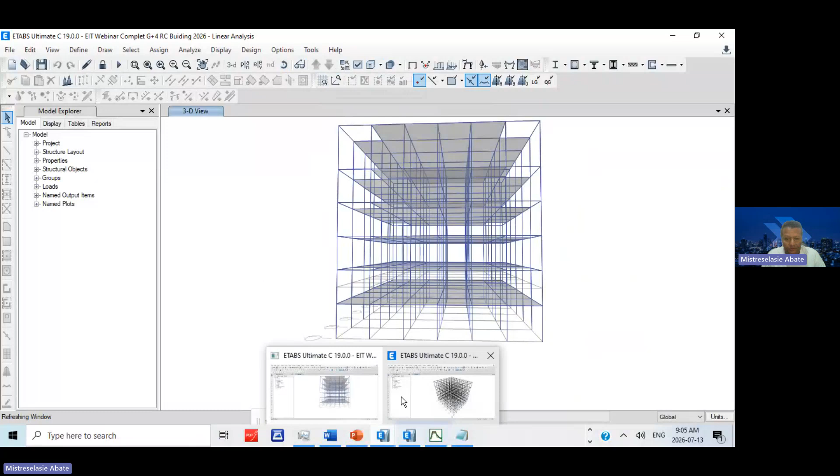In this presentation, we are going to show you not only the theoretical part, but also a sample ETABS model. This is a linear model, and we also have another nonlinear model. We will discuss this software.

And if we have time, I'm going to show you real life buildings, what we are doing. So it's going to be interesting.

If you want to know more about me, you can scan this barcode and you will get to know me. Today we are going to discuss structural modeling for PBD, performance-based design, including material properties, section definitions, load patterns, and performance objectives based on FEMA 356 and ASCE 41-17.

Pushover analysis is another type of analysis; its implementation and interpretation we will see, and evaluating structural performance in retrofitting, and an overview of performance-based principles, focusing on structural behavior, especially nonlinear analysis techniques and performance objectives.

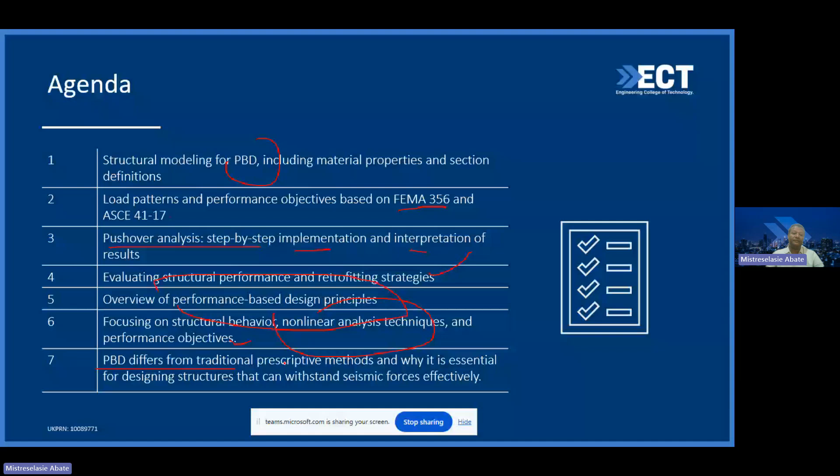PBD is different from traditional code-based design, and why it is essential. These are some of the agendas we are going to discuss today.

At EIT and ECT, we publish papers which are very critical. You can find them here and read these papers. It will give you tremendous amount of knowledge about performance-based design and about the modeling part, the linear modeling part. You can go ahead and check the part 1 webinar we did previously to get more information.

Today we are going to discuss why performance-based design matters. To know that, at EIT we did this bibliometric paper, Global Research Trend. What we did was try to analyze 3,469 PBD related papers, from 1983 up to 2024, and we used VOSviewer.

And we try to see the knowledge, how it's going. So as per our research, what we see is starting from 1981 until 2023, PBD was increasing. The awareness is increasing throughout the world.

So what we did in this research was we tried to see preferred journals, leading countries, leading organizations, and international institutions, identified utilizing the Scopus database. This is what we did, and you can also read the full research paper.

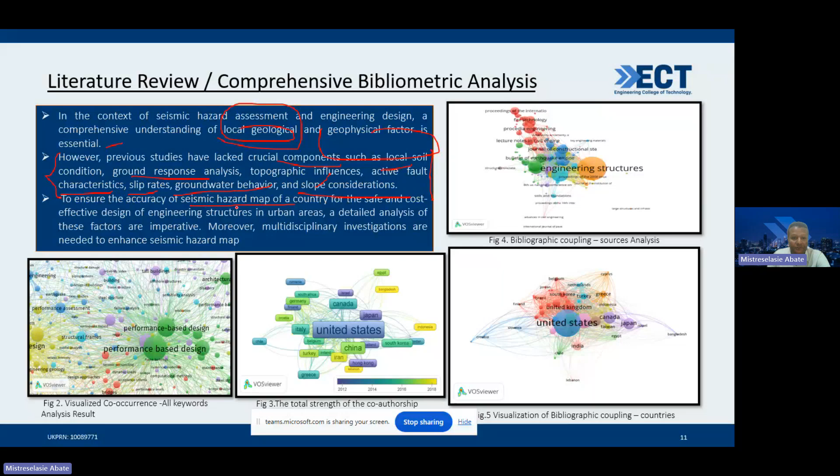As per our bibliometric analysis, we see that the Engineering Structures journal publishes a lot. The United States is the country which does better in performance-based design, and it's doing good with performance-based as the keyword. We were checking the co-occurrence of keywords, and performance-based came out as the most significant.

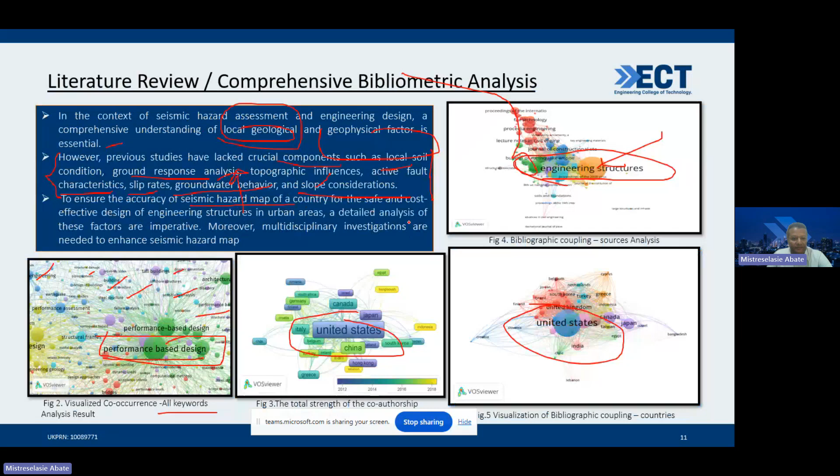So in general, from our research, what basically the hypothesis is this: we already proved it, but the challenge of adopting seismic design code without necessary adjustment, accompanied by the absence of reliable seismic mapping in the country...

Without earthquake recording stations, this may lead to structural failure. In such context, performance-based design emerges as a viable and critical solution for ensuring structural integrity and safety of both existing and newly constructed buildings.

This is a very important point. So in our study, through extensive literature review, what we found was code-based design cannot address earthquake design issues. This was the first finding.

And PBD is a cutting-edge seismic design technique. The effect of using a prescribed adopted code without amendment is very dangerous. And design approaches focusing on force are not adequate.

And the shortcoming of seismic hazard maps and PBD was introduced in the United States, and how the earthquake in Eastern Japan alerted Koreans to assess their building code. All these things were found.

Overall, this study provides a comprehensive overview of the research on performance-based design and identified the key research topics and future directions in the PBD area.

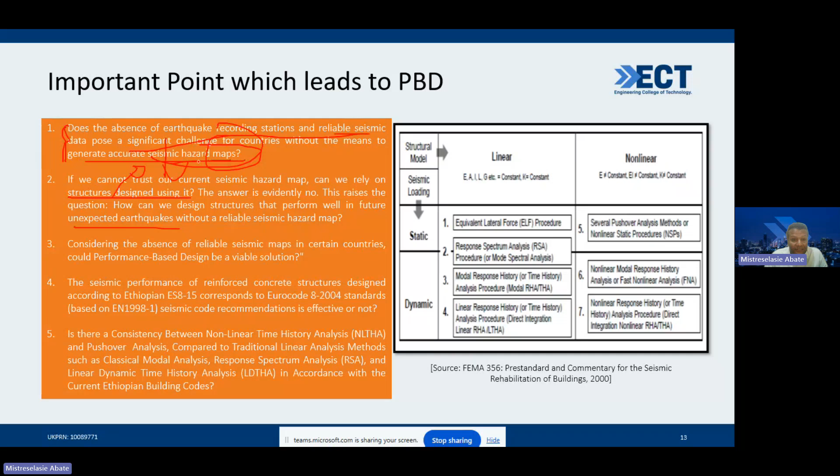This raises the question: how can we design structures that perform well in future, unexpected earthquakes? Because this seismic hazard map will give you the level of earthquake, maybe 4, 5, 6, but it is not reliable. That is a problem.

So considering the absence of a reliable seismic map in certain countries, could performance-based design be a viable solution? This is the most important part.

So the seismic performance of reinforced concrete structures designed according to Ethiopian code and its recommendations is effective or not. This was also something you should consider.

And the other one is the consistency between nonlinear time history analysis, classical modal analysis, pushover analysis, and response spectrum analysis. We will compare these. So these were the most important points.

In general, we have linear and nonlinear analysis: equivalent lateral force procedure, response spectrum, modal response history analysis, and linear response history analysis for linear static and linear dynamic analysis. For the nonlinear part, we have pushover analysis, nonlinear modal response history analysis, and nonlinear response history analysis.

So we have this and this one. These parts, we will use all this kind of analysis. So at the EIT, this was the research we did, where we did 44 story and 100 story. The problem was, if the specification of your laptop is not sufficient to analyze this as a performance-based design, it will take a lot of energy, and that was the problem we faced.

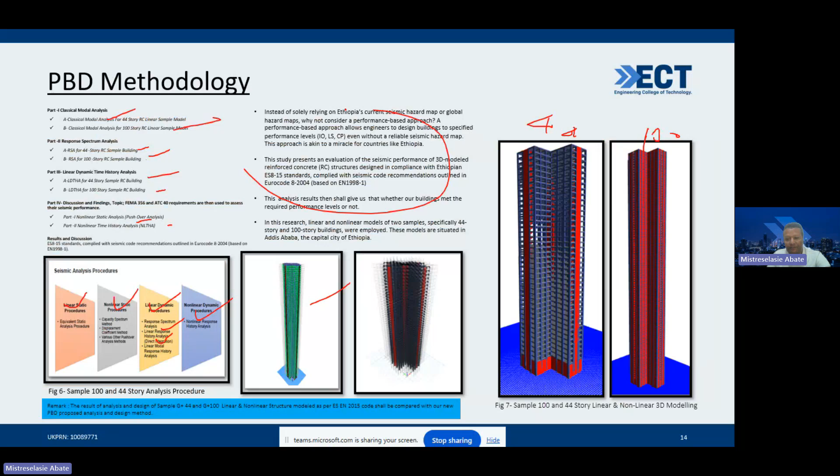But this was the performance-based design we did at the EIT, and we incorporated linear and nonlinear analysis, especially linear dynamic response spectrum, linear time history analysis, and everything. All the analysis types were included, and the result was compared. So this was for the 44 story and for the 100 story, and this was the property of the building we did.

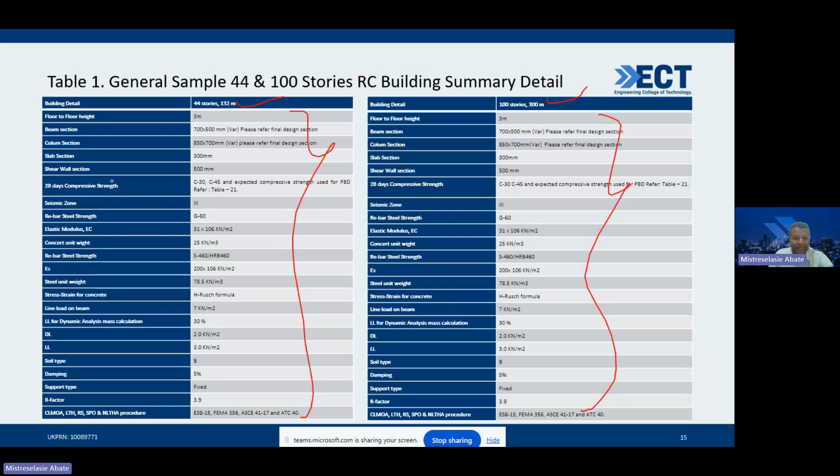So the organization of the dissertation is as follows: you have classical modal analysis, equivalent lateral force procedure, and response spectrum analysis, which will be in the linear analysis. Nonlinear time history analysis and pushover analysis will be done in the nonlinear part. This will be the organization.

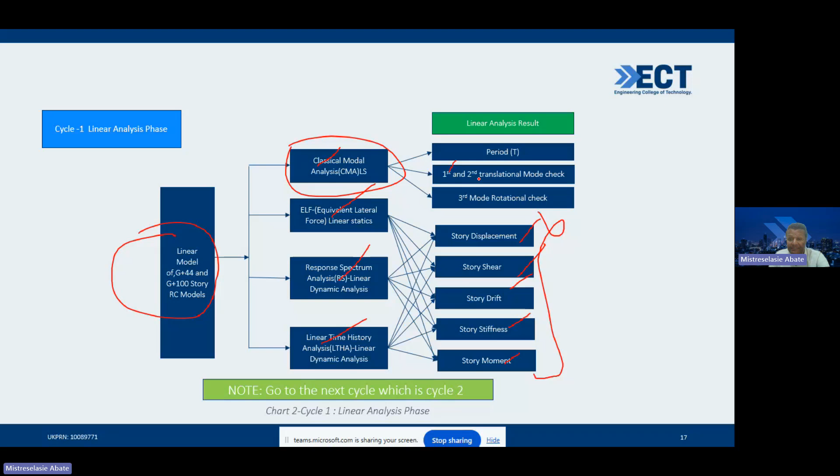If you want to do the performance-based analysis, this is what you do. In cycle one, in the linear model, you perform classical modal analysis, ELF, response spectrum, and linear time history analysis. You find the global responses like displacement, shear, drift, stiffness, and moment. In classical modal analysis, you have to check that the first and second mode should be translational and the third mode should be rotational. This is all in cycle one.

Once you do that, you go to cycle two. Now in cycle two, you change the linear model into a nonlinear model, and you perform pushover analysis and nonlinear time history analysis. Again, you find global responses like displacement, story shear, story drift, stiffness, and moment. The pushover analysis result will be verified by the nonlinear time history analysis. This is what we do.

Here, as you can see, we use the target response spectrum. This one is linear and this one is nonlinear, because we add the behavioral factor here. So there are two types of target: this is inelastic and this is elastic. For your nonlinear model, since you change your building into nonlinear, you will use the elastic one.

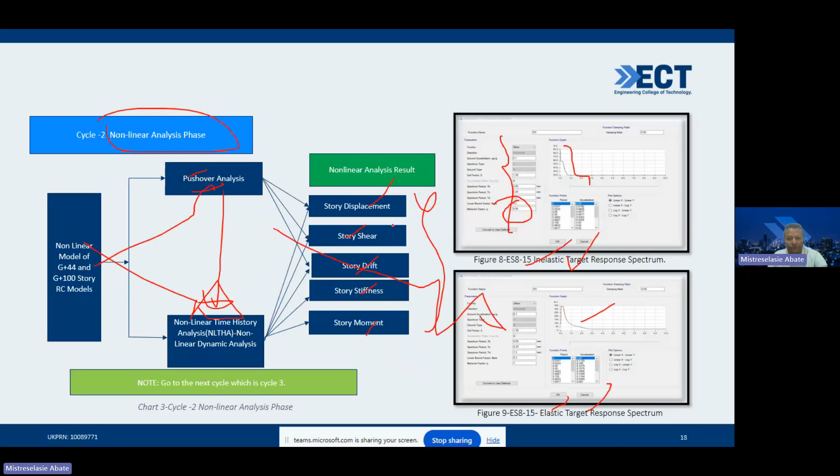That's what you do. Then in the third step, you compare cycle one and cycle two results. If it matches, okay. If not, then we take the nonlinear result for verification.

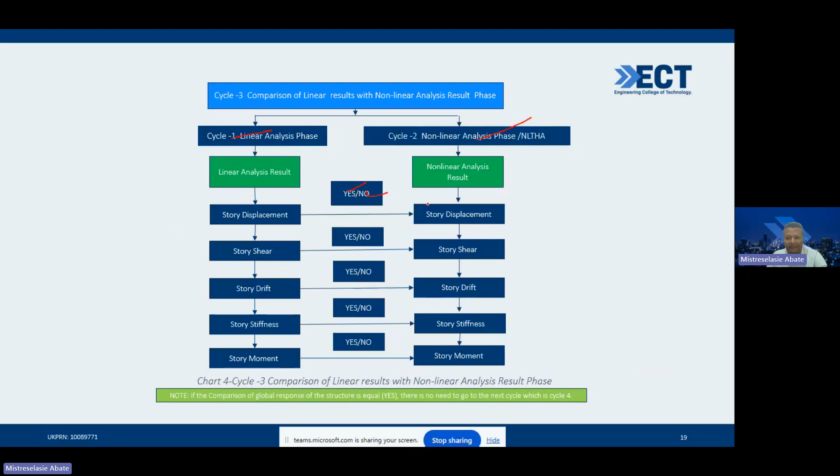In the comparison of cross section, in the linear analysis you get the cross section for beam with reinforcement bar and ties, and for nonlinear also you get the same, so you have to check this. Then optimization will be done. In the final step, from the nonlinear result we get, we optimize the linear analysis. And for the nonlinear analysis, you need earthquakes.

So to download these earthquakes, what we do is go to the PEER website. Let me show you, this is the website. In the PEER website, you sign up here, but you have to use your educational institutional email. Once you do that, you go here, NGA West 2. This is the database. Once you click this database, the PEER ground motion database system will come up.

And in PEER, you submit your search. What we are going to do is, everywhere in the world, whatever earthquake comes, it gets recorded here. So you give the magnitude, for example, and you give RJB and all these things you should know, and as per your need, you fill this. For example, fault type: strike slip, normal, reverse, SS normal or reverse, all these things, and the spectra ordinate.

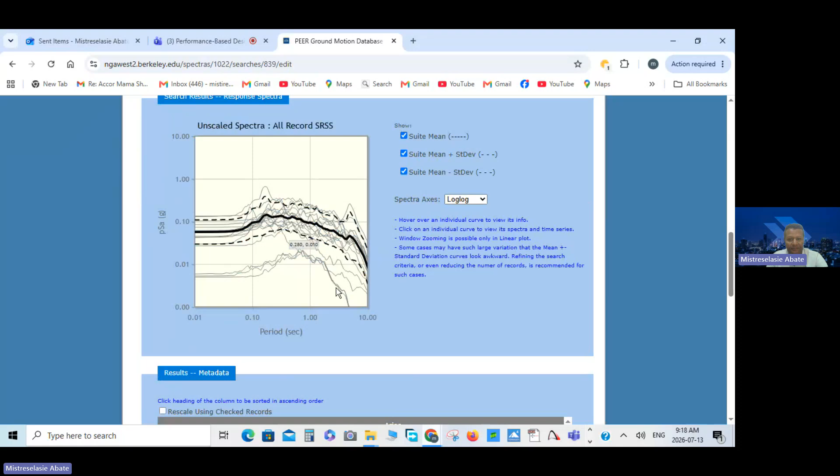Once you fill in the type of earthquake you need, if you know the recording station, you can put in the event name and the station name and automatically it will give you that. Otherwise, you just give the range of the magnitude and whatever else you need, then click search record. Once you search record, it will automatically, as you can see, give you the standard deviation value.

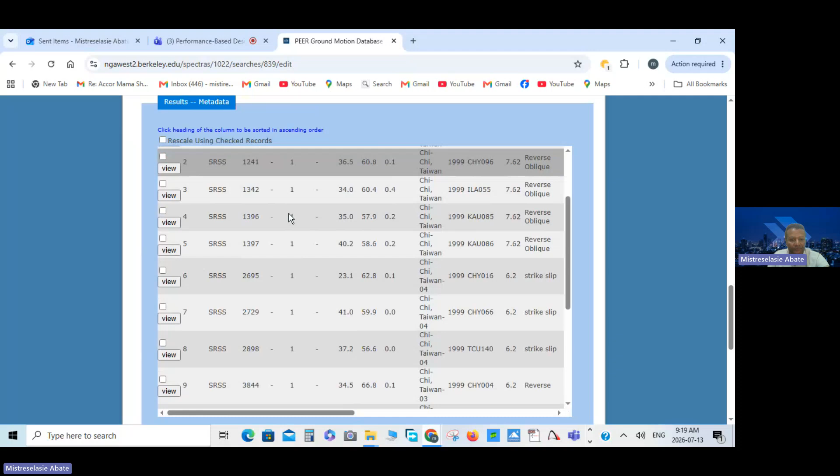So one sigma mean plus standard deviation, it will give you the value. Then as you can see, it will generate around 18 earthquakes. For example, this one is in Taiwan — most of the earthquakes happened in Taiwan as per our research — and it will give you all the information, the magnitude, everything. Once you get this, what you do is use SeismoMatch.

You bring this earthquake into SeismoMatch, and as you can see, for example, this is Imperial Valley, Landers, Imperial Valley. These are past earthquakes. So we will import it here, okay? We will import it here, and you can see, once you have the acceleration, it will be integrated to velocity and integrated into displacement.

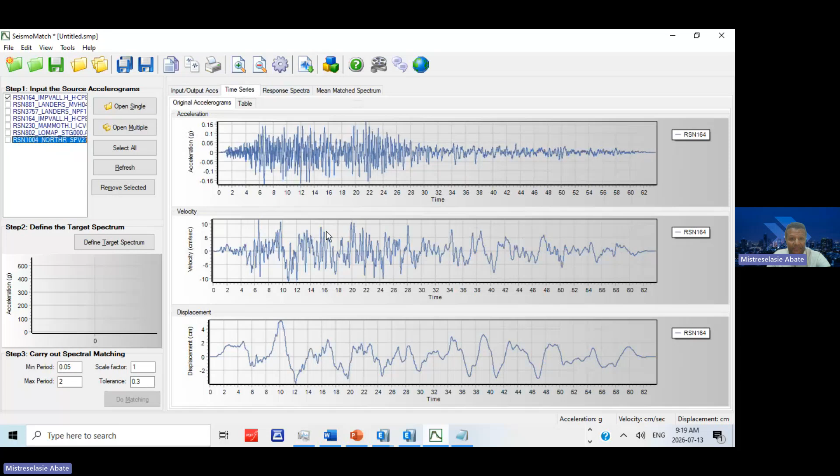So what you are going to do is match this one. For example, you can define as per Eurocode, 0.01 damping ratio is 5, ground type importance factor like 1, for example. And let's say this is our target response spectrum.

So as per this target response spectrum, we are going to match it. When you say do matching, the software will match the ground acceleration we downloaded, and in a minute it will give us the result. You see, it's okay, now matching is done.

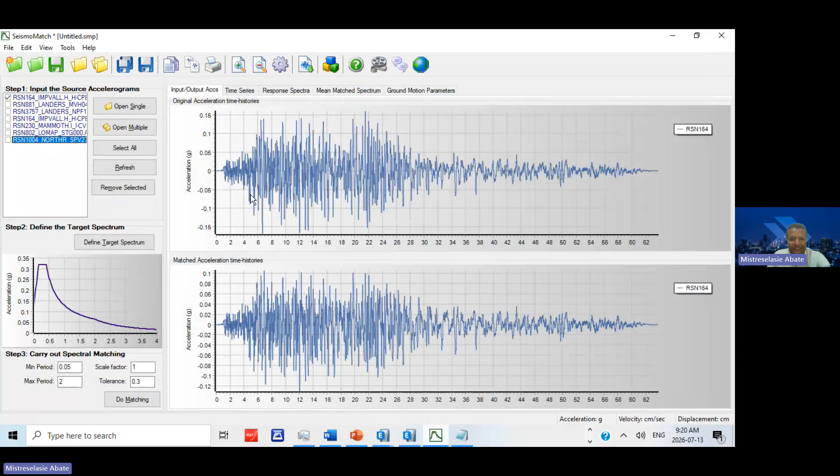Now this is matched ground motion, you see? This was the original earthquake, this is the downloaded earthquake data, and this is the target response spectrum, as you can see. Now, after matching, you see this curve is almost okay. So from 0.2T until 1.5T, the earthquake data should be above your target response.

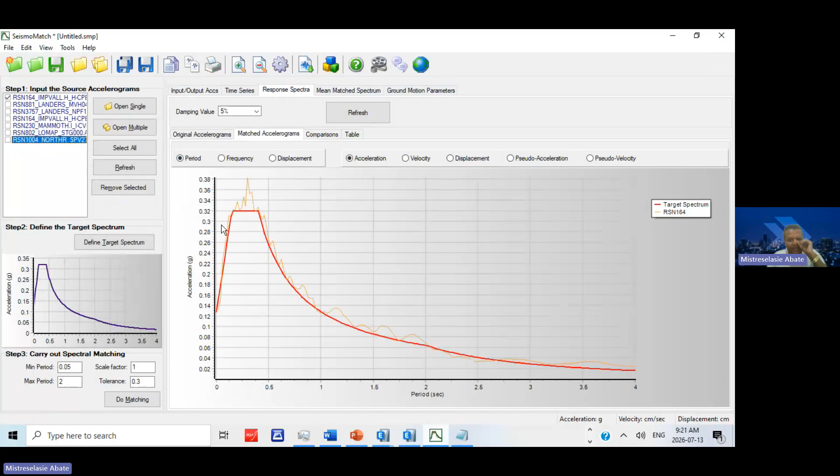This is how we do the matching and scaling. We will come to it later.

This is the earthquake we use. Landers, Northridge, most of these, the year it happened, recording station, magnitude, Vs30, PGA values, and this is the mechanism: strike-slip, normal, oblique. And this one is SRSS for the combination, because we are going to use 11 earthquakes and we have to add it up.

Okay, so ETABS also has the capability of matching. You see, this is matching. You can match it in frequency domain or time domain. Both domains you have the option. You bring the earthquake data and you have the target response spectrum, and we match it. So ETABS also matches it.

Instead of SeismoMatch, you can use this as well. This is how we did the matching, because this is the earthquake data directly downloaded from the PEER website, and this is the target response spectrum, and this is the matched one. So this is how we do it.

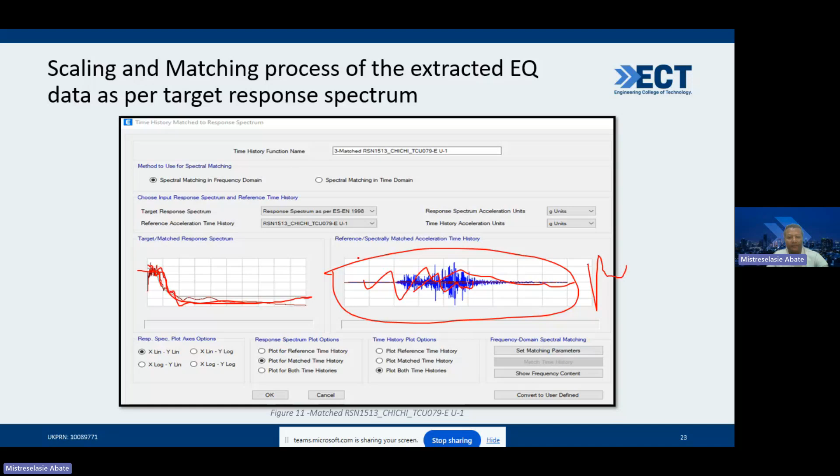So in classical modal analysis, as I told you, the first mode and second mode should be translational, and the third mode should be rotational. So is my structure safe? Now, the most important question is: is my structure safe?

So how does modern code intend to ensure safety? The first one, they define appropriate estimated hazard or load level. They give us this, it's okay. Again, define procedure for analysis and design, this is the other thing. And provide specification for construction and monitoring, and prescribe limits on structural systems, members and structures, and provide rules for detailing.

And all these things, hoping that they will reduce vulnerability. So safety requirement gives acceptable solution and prescribed procedure, rule limits, mostly based on experience, and it's not always rational, all these things. So it is okay working with the code, but we will see why performance-based design is important.

So in prescribed code-based design, the public will always ask: will the building be safe? That is their question. The owner will ask you: will the building collapse? Will it be damaged? Can I use the building after a given earthquake? How much will the repair cost be, and how long will it take to repair? And can I make a building that will not be damaged and will not collapse? This is a question from the public side.

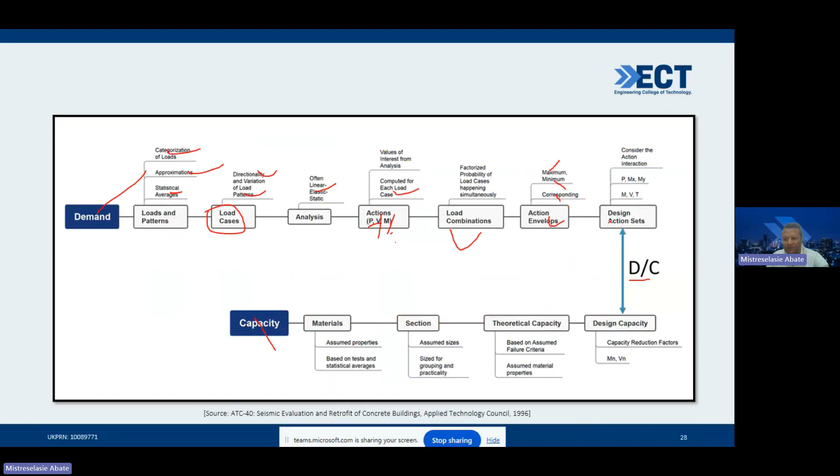Even this DC ratio, the problem of DC ratio is in the demand side, and again in the capacity side, we have a lot of assumptions. For example, load and pattern, category of load, approximation, statistical averaging. Again, in the load case we have directionality and variation of load pattern analysis, often linear elastic, and actions computed for each load case: P, V, M, shear force, moment, value, interest from analysis and factor. We have load combination and we will factor it. Again, action envelopes, maybe we will take maximum or minimum, design action sets. All these things are approximations, okay?

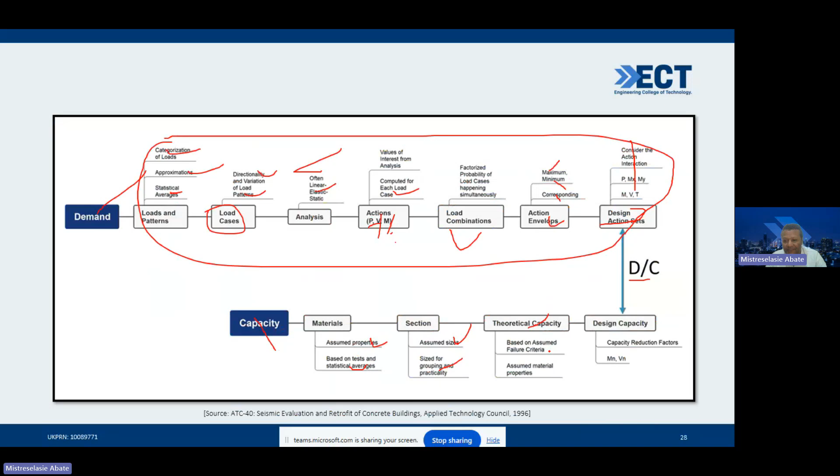Again, in the capacity side, in the material, we will assume the property based on test and statistical averaging, and for section, assume size, all these things as you can see. So we are assuming even the DC ratio, which the engineer says is safe, has its own assumption. That's why in the code, it's a little bit difficult.

We use this Runge-Kutta and other step-by-step integration method to solve the general equation of motion. So this is why performance-based is required.

So this is a guess. But in the PBD, what we say, why we guess like this, okay? What PBD is saying: get the real stress-strain curve or moment rotation and the capacity of your structure, and apply the load, check service level and get the serviceability, and check MC level and check the ultimate limit state requirement. So in this way, no need to guess. That's what the performance-based is saying.

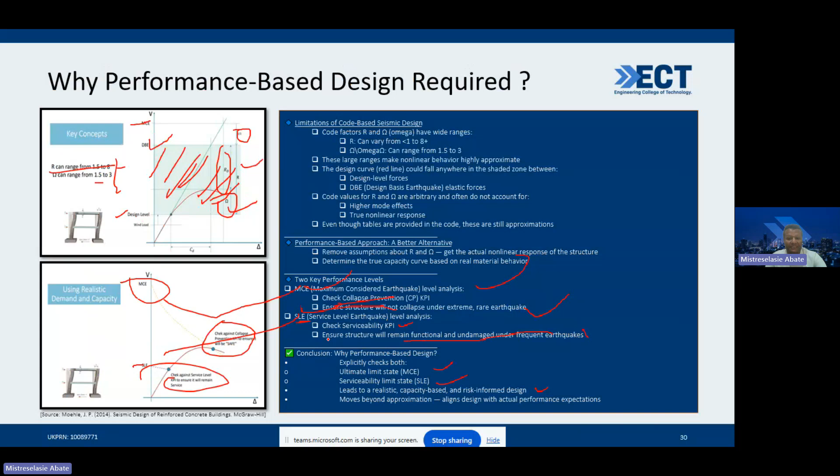So in conclusion, why performance-based design: explicit check for ultimate limit state and service limit state leads to realistic and capacity-based and risk-informed design. That is how performance-based is done. So we have intuitive design, we start from the intuition, then code-based, then performance-based, then consequence and risk-based design, then resilience-based design. This is how it's going.

So as I told you earlier, just you have the section and know your stress-strain curve, and you apply this moment rotation and stress-strain curve into your building and change your building from linear to nonlinear. Then use pushover analysis and nonlinear time history analysis, and you will get the result. This is all what performance-based is talking about.

So once we get the cross section from the initial linear code-based, we use that one translating to a nonlinear model. Once you get linear analysis, then you will change it to nonlinear model as we have seen in the beginning. So convert the model to nonlinear, for example plastic hinge modeling or fiber hinge modeling. Assign appropriate hinges for beam column. For us, we use plastic hinge modeling for beam and column, and for shear wall we use fiber hinge modeling. Then define moment curvature, moment rotation.

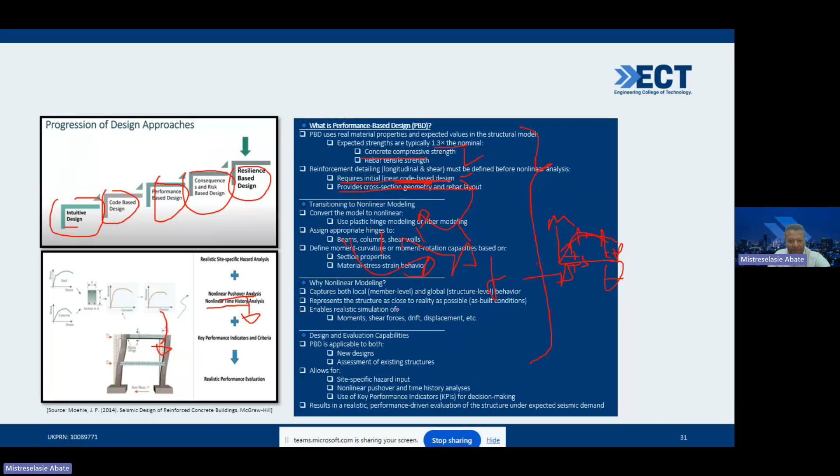Once you do service level and MC level, for service level no problem, you can use the response spectrum. For MC level, you can use nonlinear time history analysis. Now check the performance assessment based on SLE and MC level. If the check acceptance is okay, then finish. Otherwise, change the design. You go back to the linear analysis again, and you have to go through the whole process. This is how performance-based design works.

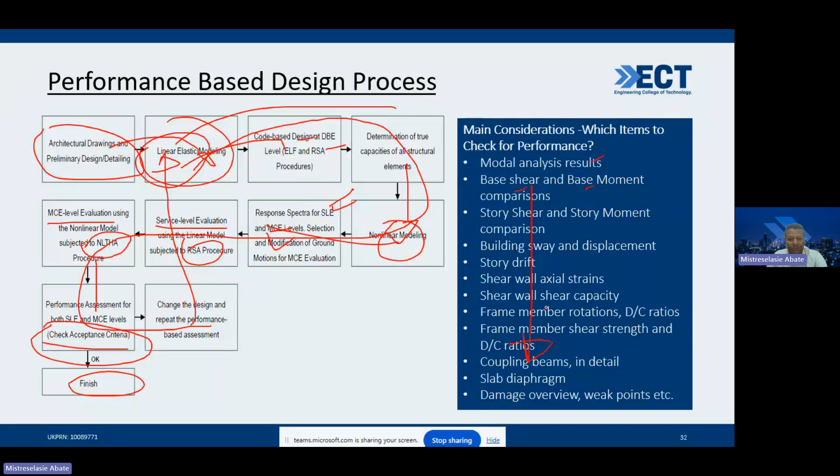So the main consideration, which items are checked for performance: modal analysis, base shear, base moment, all these global responses, and DC ratios, everything will be checked. So we have, as we have seen, operational level, immediate level, life safety level, and collapse prevention level.

As you can see here, once you give the moment rotation curve, we have these levels. Depending on the force, you see from 0% until 99%, because you have the capacity. So when the earthquake comes, depending on the different level, you see until it's collapse, but until it's extremely damaged, but not collapse. Collapse prevention means you have extreme damage, but not collapse.

Life safety level and so on. So you will agree with the board, okay? The PBD board, which determines the key performance.

For example, stiffness, stability, strength, deformation, drift, ductility, damage, damping, energy dissipation, and acceleration. So these key performance indicators will be agreed with the PBD board. Even you need a board to accept the performance levels. Then as per that performance level, the PBD will be done. So PBD in a nonlinear dynamic model.

Okay, so now let's see performance-based seismic design. We have seen it, but in the code-based approach, it prescribes the specific criteria and procedure that design and construction must conform to. This is the code-based approach. Engineers do not actually evaluate the ability of the structure to perform as intended by the building code. This is the limitation, again limitation in use of structural systems.

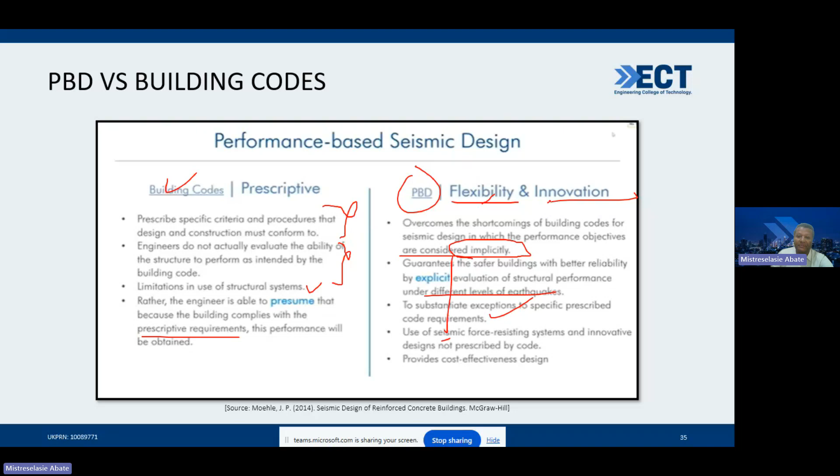But in PBD, we have flexibility and innovation. For example, it overcomes the shortcomings of building codes for seismic design, in which performance objectives are considered implicit, and guarantees the safety of the building with better reliability by explicit evaluation of structural performance under different levels of earthquake, and to substantiate exceptions to specific prescribed codes. So you can go ahead, this is the flexibility and innovation of performance-based design.

So let's see now what is operational level, immediate occupancy, life safety, and collapse prevention. In the operational level, negligible structural and non-structural damage, occupants are safe during the event, and utilities are available also, like water, light, electricity, and all these things. Facilities are available immediately once the earthquake stops, and people can start their regular work. The loss is less than 5%.

What about immediate occupancy? In immediate occupancy, negligible structural damage, occupants safe during the event, minor non-structural elements damaged like HVAC and something, and the building is safe to occupy but may not be functional. Maybe they can occupy, but it's not functional. Limited interruption of operations might happen, and the loss will be less than 15%.

And life safety: we have significant structural damage, some injuries may occur, extensive non-structural damage, and the building is not safe for reoccupancy. The loss is less than 30%.

What about collapse prevention? This is extensive, near collapse, structural and non-structural damage, significant potential for injury, but not wide-scale loss of life. This is extended loss of use. Repair may not be practical, and the loss is greater than that, but not collapse. That's why we call it collapse prevention.

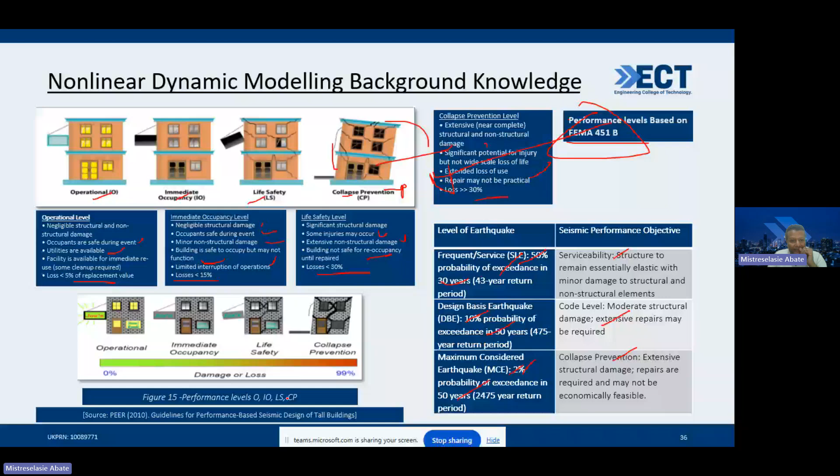So all these are what we have discussed, and now you have the idea of what is IO, life safety, and collapse prevention. As we have seen, we have MCE level, and 2/3 of MCE level is DBE level. Service level has a 43 year return period. This is also very important, and this is how to calculate it.

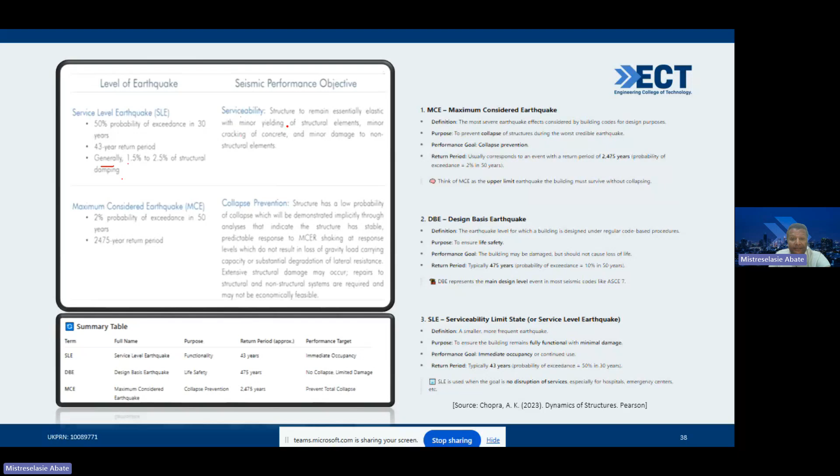The other important thing is level of earthquake. We have seen it now, 50% in 30 years, and the period generally 1.5 to 2.5% damping, and serviceability means a structure remains essentially elastic with minor yielding of structural elements, minor cracking of concrete, and minor damage to non-structural elements. This is service level check.

What about MCE level? This is 2% probability of exceedance in 50 years. And this one is collapse prevention: the structure has a low probability of collapse, which will be demonstrated implicitly through analysis that indicates the structure has a stable, predictable response at this shaking level, which does not result in loss of gravity load carrying capacity. So these are the two levels we check in performance-based analysis.

So we have seen all this, MCE level, DBE level, and service level, you can go ahead and see. Now let's go deeper into the technical part.

For example, service level evaluation uses a linear model, and as I told you, you can use response spectrum analysis. Accidental eccentricity is not considered in service evaluation, and critical damping ranges from 1.5 to 2.5, and load combination includes dead load, live load, and 100% earthquake in X and 30% earthquake in Y.

Okay, this is what we do. This one is for quasi-permanent load cases, what we use. Okay, so for MCE evaluation, expected service live load is 25%. This is for quasi-permanent load cases. So R factor, omega factor, and CD factor are all taken as unity at this point, okay?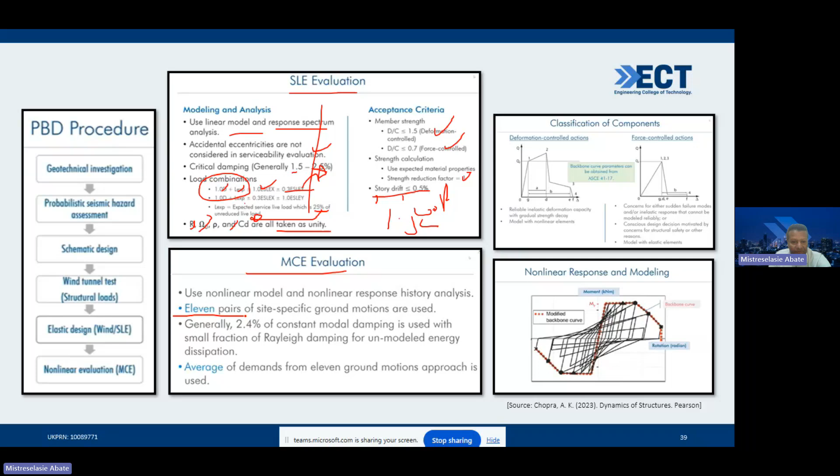MCE level evaluation uses a nonlinear model in a nonlinear response history analysis. As we have seen, we have 11 earthquakes, and generally 2.4% constant modal damping will be used, and we take the average of these 11. Then we have 11 global results, for example shear force 1, shear force 2, up to shear force 11. So you have to RSS these values.

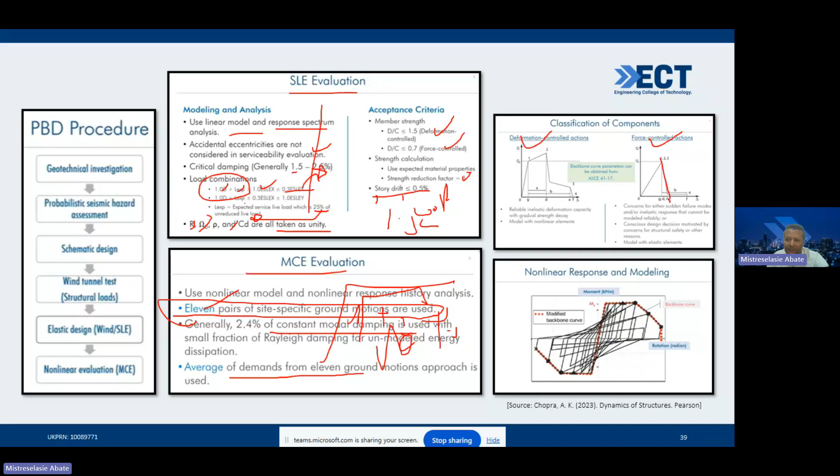So deformation control means this is deformation control, and this one is force control. This is brittle, this one is ductile. As you can see, this is reliable. And we also have the hysteresis loop. Different hysteresis loops, this will be done in the laboratory by loading and unloading forces, and it will give you the backbone curve.

As you can see, when you load it, it will go up, unload it, it will go down, load it again, and it will rotate like this, okay? Then this backbone curve will be idealized like this, bilinear or trilinear backbone curve, and it will be used for our design. So this is the behavior.

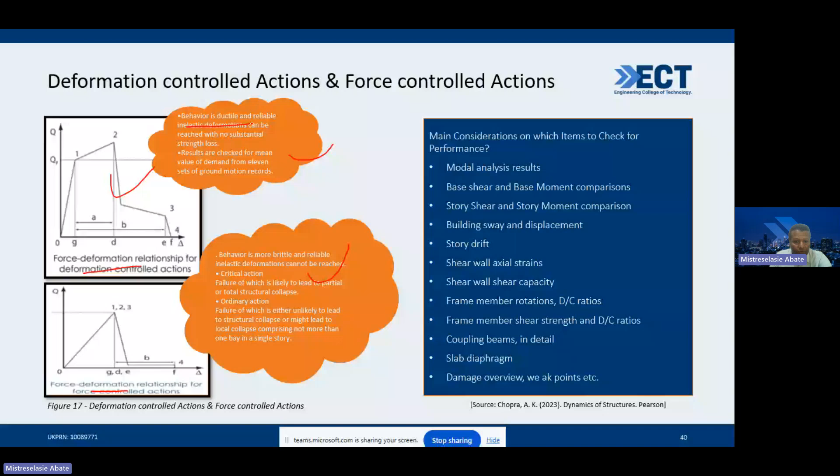Okay, for ductile behavior, what is the force deformation relationship for deformation control and for force control? If it is deformation control, the behavior is ductile and reliable, as you all know. And if it is force control, it will be brittle. This is the most important thing.

Again, some of the characteristics, for example, when you do performance-based analysis, peak transient drift, meaning in the beginning of the time history, the maximum mean value should not exceed 3%.

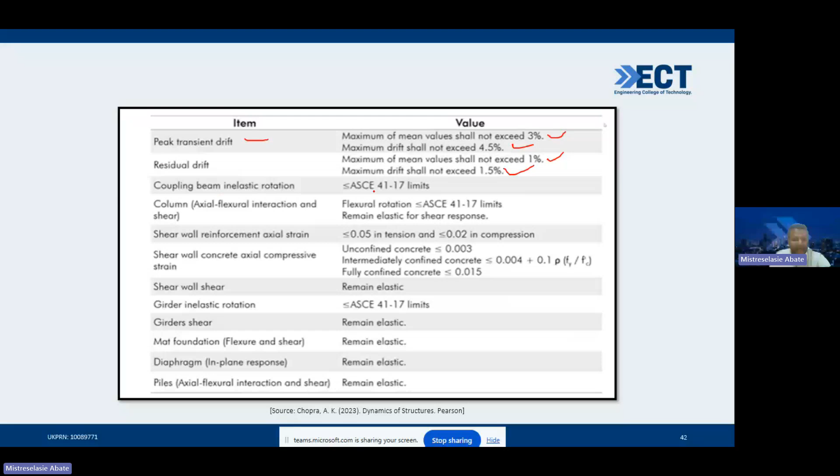This is for the drift, and maximum drift shall not exceed 4.5. Maximum of the mean value should not exceed 1%, and maximum drift shall not exceed 1.5%. And coupling beam inelastic rotation, this is as per ASCE 41-17 limits. And column, axial-flexural interaction and shear. This ASCE, we will see it in a minute.

Very important guideline, okay? Shear wall also, as you can see, axial strain 0.05. What is 0.05, 0.02? We will see it in a minute. And unconfined concrete 0.003, and intermediate confined concrete 0.004. This is the formula you would use. And fully confined 0.015. Do you see the difference? This is 0.003, this one is 0.015.

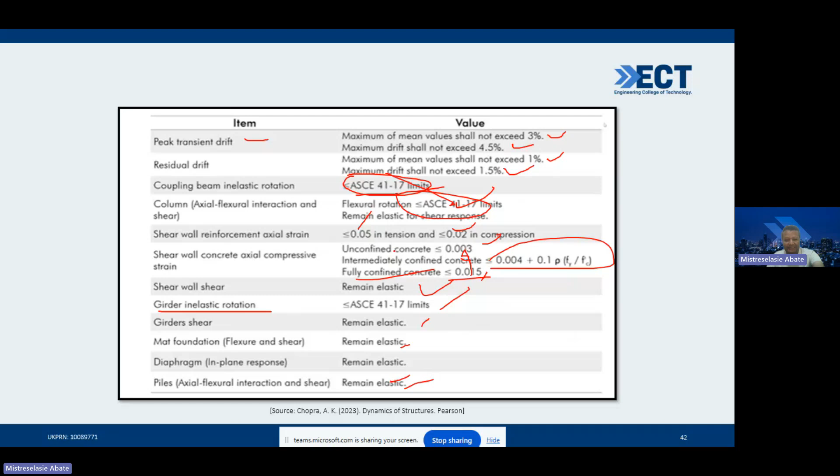So the confinement is very important. Shear wall should remain elastic. And again, for girder, as you can see, this is some of the criteria as per ASCE. After you do the performance-based design, you have to check a lot. So acceptance criteria, as I told you, there will be a performance-based board. They will accept what the drift will be, what the stress-strain should be, whether it is IO or collapse prevention, immediate occupancy. All these things should be agreed in the acceptance criteria with the board. This is only a sample we give you.

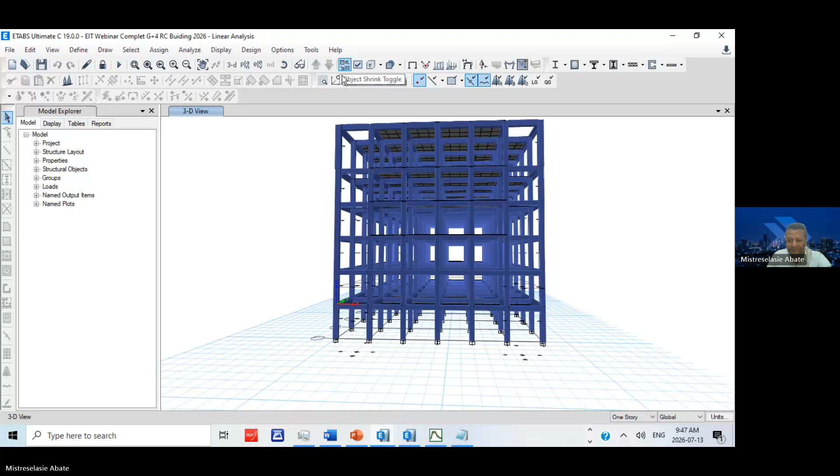That's why linear analysis should be performed first, if you remember in our workflow, that's what we say. So let me take you back to this point in our model. As you can see here, this is our building, okay? So last time, as we discussed, you have to start from linear analysis. In our first webinar, we showed you how to design, how to design the column, and so on.

As you can see here, we have material, for example here this is the concrete weight, volume, and we have elasticity, Poisson ratio, coefficient of thermal expansion, shear modulus, and everything is given here. This is for material definition. And we also have rebar, for example rebar Fy 500. For the rebar also we have weight, modulus of elasticity, coefficient of thermal expansion, and everything is given here - minimum yield strength and minimum tensile strength, everything is given here. So you have to start from the definition, then go to section definition, and give the beam section, for example 50 by 50.

This is the section we give 50 by 50. Last time we discussed also the shear area and the torsion, because in the beam and column, we have to give 0.5 factor as per Eurocode. So you have to take care of this part, okay?

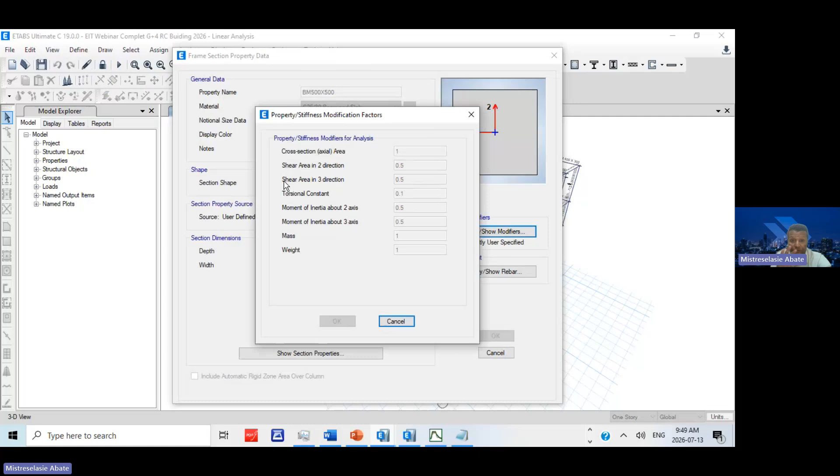And the other thing, the column also the same modification. Let's see, as you can see here, we give for the column also the same. And for the definition of slab, you have to give, for example, flat slab here. For slab, we have membrane action and bending action, and shear action.

The shear action, this is very thin, L over 10, okay? So if it is lower than 10, we don't need it, because shear action is very important when it is raft foundation. In the raft foundation, the shear action is also available. So for this part, for slab, for thin slabs, we don't use it. But for the other one, we give modifiers, okay?

Very important, and diaphragm, this is for the center of mass. Last time, let me show you the center of mass. Here, where is diaphragm?

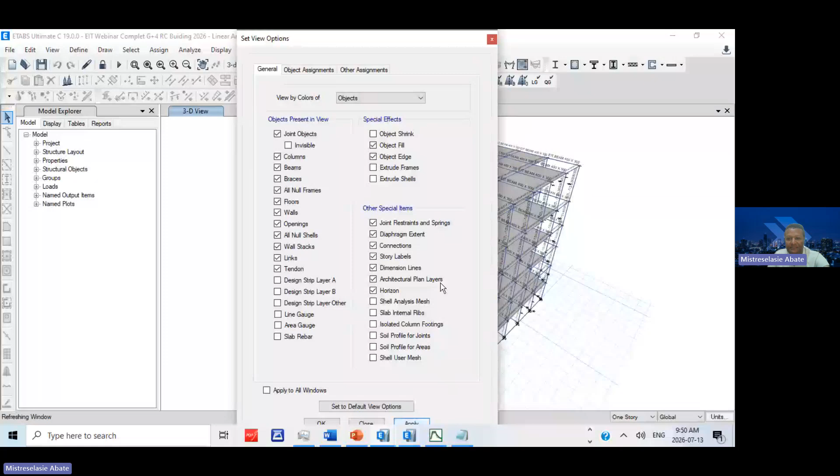Nonlinear hinges and moment. Okay, sorry, here, diaphragm extent, yeah. Okay, so let's turn it on. This is the center of mass, you see, in plan. Okay, second floor, so this is the center of mass, okay?

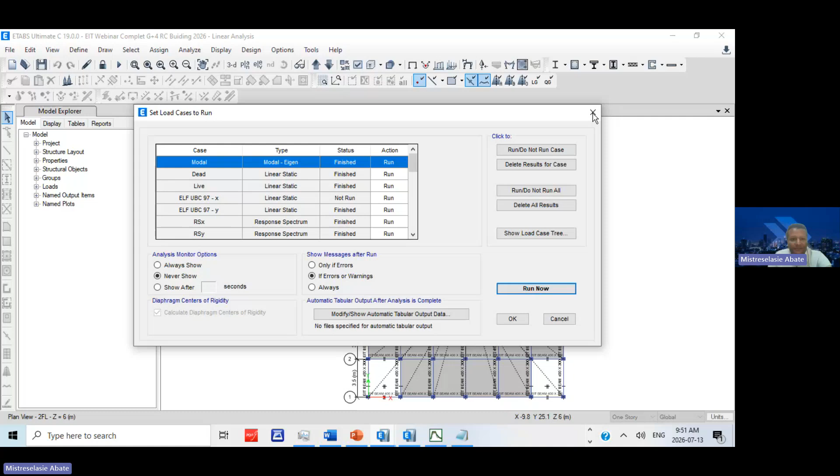And for the center of rigidity, last time we saw, to get the center of rigidity, you see, calculate diaphragm center of rigidity, you have to tick it. Otherwise, center of mass and center of rigidity will not be calculated, okay? So what we do, let's go back and turn off this part, diaphragm extent. Okay, sorry.

Okay, 3D. The other thing, load pattern, we have dead load, live load, and earthquake. This one also we discussed last time. ELF, this is everything you have to get from the code, okay? You have to get it from the code.

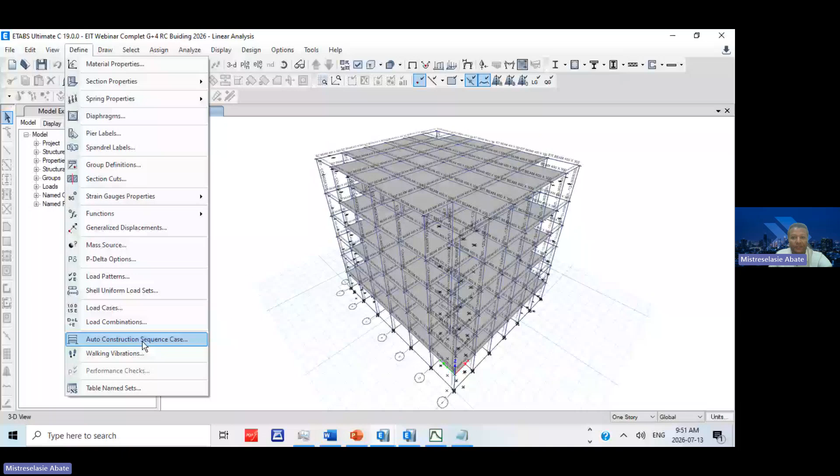And we have also load combination. We have ultimate limit state and serviceability limit state. For the ultimate, we use only 1.35 and the live load is 1.5. Just the overview I want to show you, because once you design, the first thing you have to check is mode shape.

For example, mode 1, let's check it. Sorry, mode 1, and very quickly let's check, because the first mode and the second mode should be, you see, translational. So let's start.

The animation, I want to show you the animation. Okay, so this is pure translation. Again, the second mode, let's check it. This is also pure translation. The third mode, it should be torsion, okay? So let's check it.

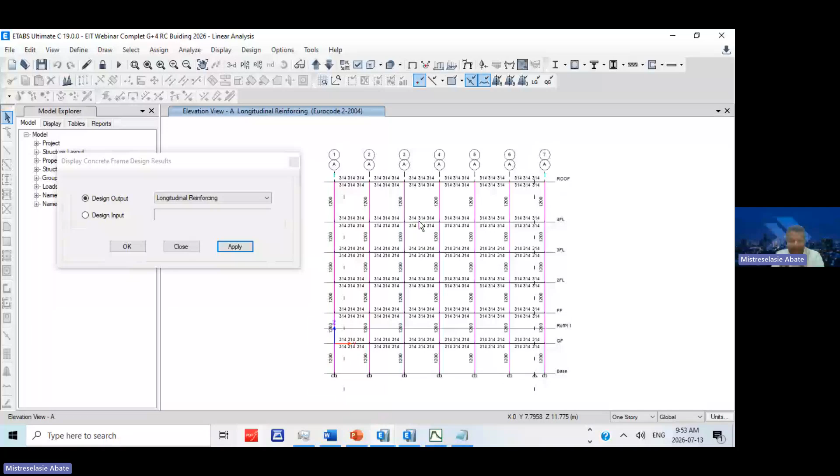Okay, so this is the most important point you have to check. Once you check this and once you run the analysis, let's go to reinforcement bar and let's see the rebar. Okay, this is the rebar, you see. Let's make it elevation. Now, in the linear analysis, you see, you get now the rebar. So let's check the result.

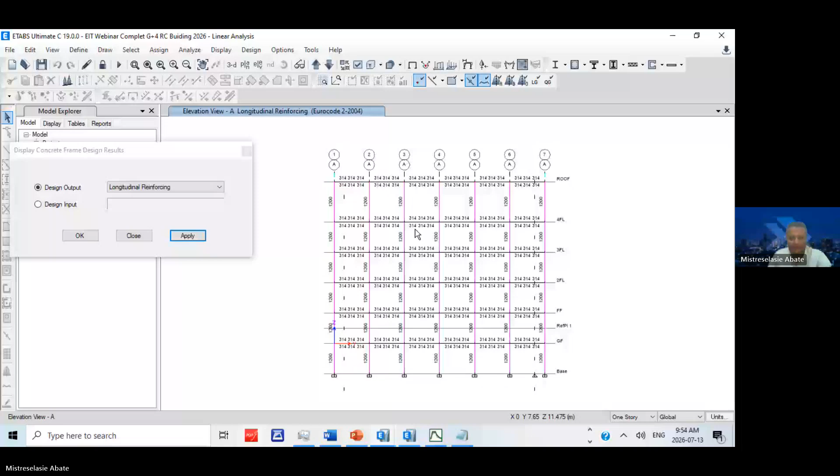For example, okay, it's a little bit slower. Okay. What I want to show you, once you get the rebar, longitudinal rebar, from your linear analysis, let me, okay, make it plan. Let's make first floor and like this. Okay. This is the reinforcement bar the software will give you.

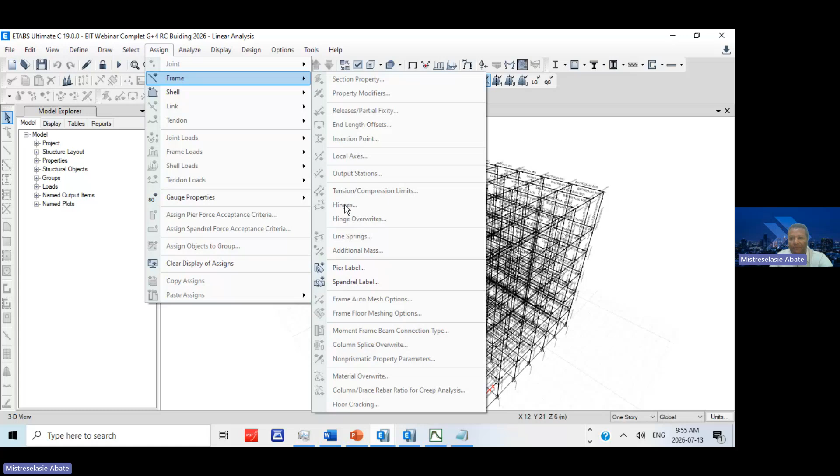Now, we will go to nonlinear analysis. The same linear analysis, we will change it into nonlinear. How do you change to nonlinear? You choose the section. We show you this one also. We choose the section and we assign. Okay, we come here, we assign frame, you see hinge. Now it has run already, it's not working, but you make it hinges and you apply the hinge. Once you apply the hinge, now your building has been changed from linear analysis to nonlinear analysis. Now your building is capable of capturing the capacities.

So to see the capacity, for example, let's go here to load cases, for example, pushover. Okay, pushover, let's start from number 1. Now, when we apply earthquake, you see already the building now capturing which level is your building. For example, let's go to second level. In the second level, already most of the building capture, the capacity is already in this range. Okay, it's okay. Now third, you see some hinges are forming.

Let's go to fourth. Let's go to fifth. You see, still, blue is formed here. 1, 2, 3, already we are in this range now. Now let's go to 6, you see, in the base also some hinges are formed. And 7, already here you see. And let's go to 8, still in this range. And 9.

Still we don't reach this collapse prevention. And 10. Again 11, okay, 10 is the last. So as you can see, our building is safe. Nothing has passed the collapse prevention.

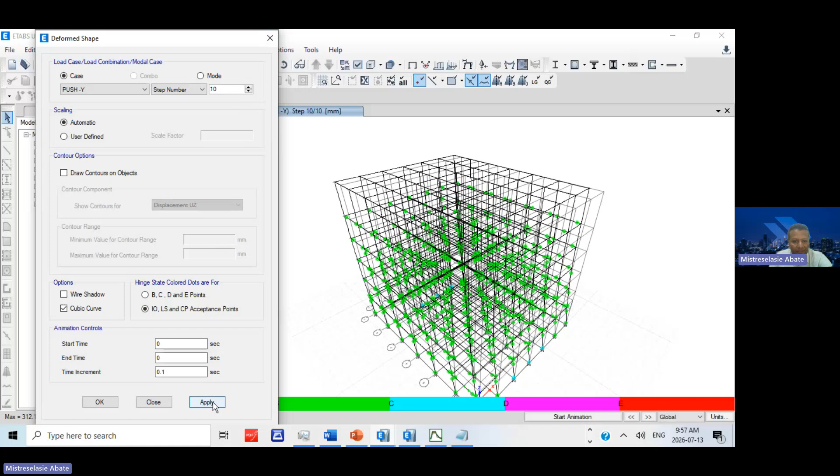So this is how the performance-based is done, okay? This is how the performance-based is done. Some, now at step 10 already, these areas, you see, some of the base, especially in the base area, we have collapse prevention passed already, okay? So let's start it again, because that one is on the colored base.

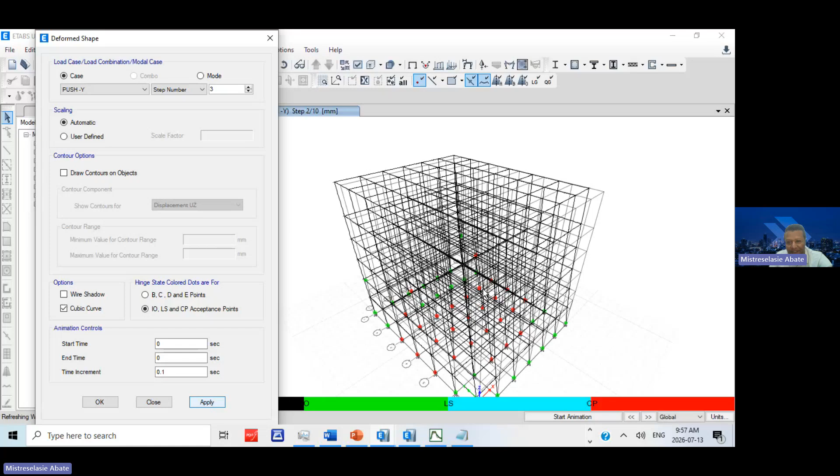So number 1 is this. Number 2 is this. Already in step 2, already some hinges are already past collapse prevention. Number 3 already here, but almost in the base, you see? Almost in the base, you see? Something like that. So it will give the engineer the capacity to see

The performance of the building. And what I want to show you here in the frame, let's go to here. Let's hold all the hinges. Okay, these are the hinges which were created.

Now, for example, let me take you here. Let's modify. You see, this is the backbone curve of ETABS. It will use the reinforcement and the cross section, and it will give you the points. It will give you the point. You see A, B, C, D, E, A, B, C, D, E, and it will draw the capacity, moment curvature curve. If you moment rotation, this one is moment rotation.

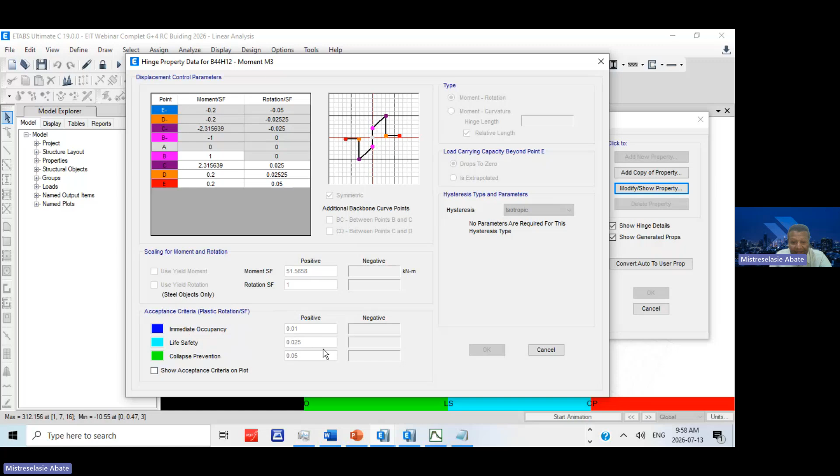And in the moment rotation, you see immediate occupancy, life safety, and collapse prevention. Already the capacities, the criteria are already included. Okay, already included. So ETABS has a capability to capture where is the immediate occupancy, life safety, and collapse prevention. But from where will it get it from?

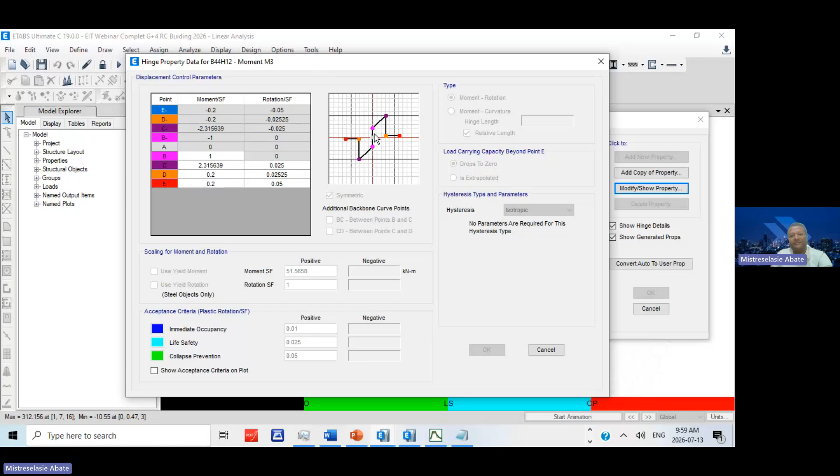The linear analysis, and I will take you back, and it will start from here 0 because the yield, no problem. So the yielding is divided by the moment, and it will come at 1 here. So ETABS doesn't capture until the yielding point, no problem. So that's why it will give you like that.

So these are all, you can go ahead and see, for example PMM for the column also, we can see modify. As you can see for the column, you can go ahead and check the angle, okay, the interaction curve, the angle you can change, and you can see the immediate occupancy, life safety, and collapse prevention.

And now, the most important thing at this level, what you should know is that now our building from linear analysis, okay, from linear analysis to nonlinear analysis, now we have the capability to check the performance, okay, to check the performance.

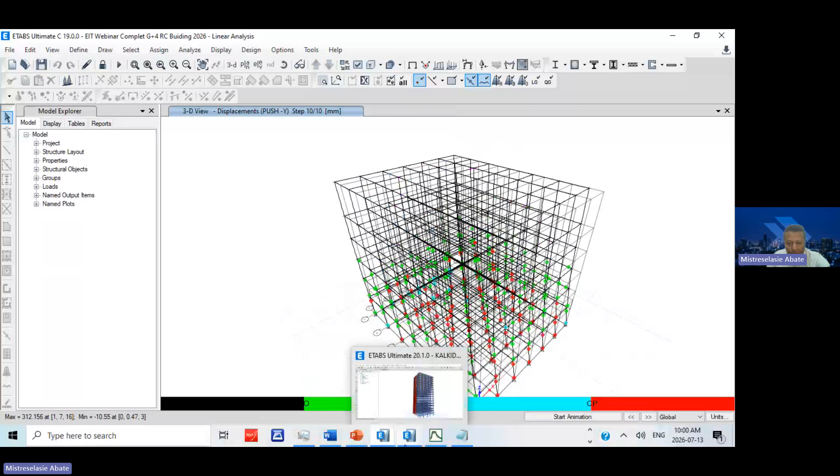So before we go to that, this is our real project, okay. This is one of our real projects. In the real project,

For example, in the load combination, let me show you one load combination. We have around more than 127 load combinations because we have wind load combinations and we have imperfections also. So the imperfections will be joined with the earthquake and it will make it more than 128, 130, 140 load combinations. So when I say here the load combination, for example for this one, for our linear, we use only 2 load combinations, okay, just for you because ultimate and serviceability. But we have earthquake and we have wind loads also.

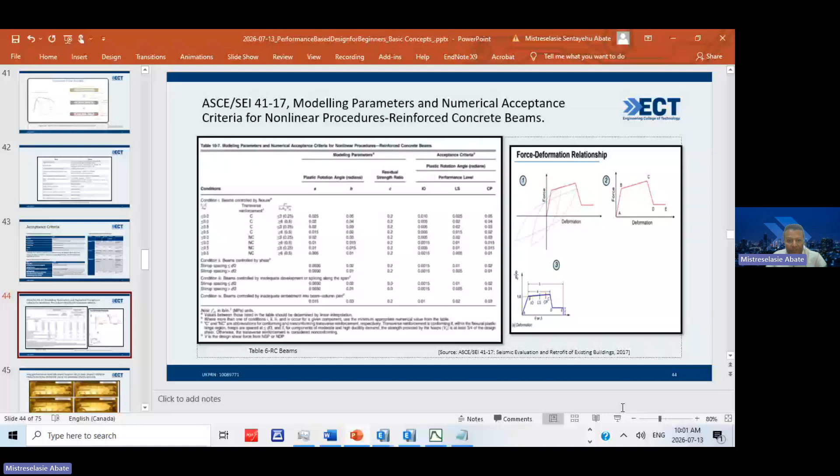Okay, let's go back. And so now you know the beauty of ASCE, yes? Because with ASCE now you don't have to always go to the laboratory and you don't have to always know what is the capacity of my section or something like that. You don't need to do that.

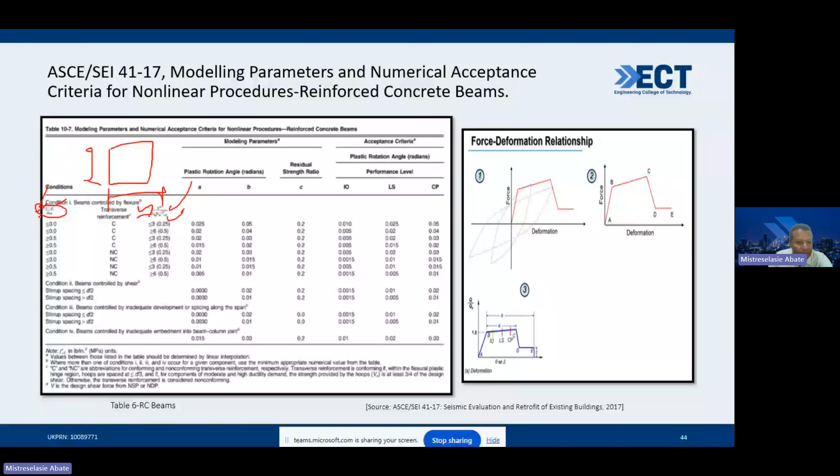Because once you know the reinforcement bar and everything, the section and the shear force and the B and the D means you have the section here, you have the depth of your section, and you have the B, and you have the shear force and FC prime, the concrete quality, and you know the reinforcement bar, rho prime, okay, compressive, and this is for tension, and this is for compression, this is rho balanced, and you will check only conforming or non-conforming, and you know the value of your A, B, and C, okay, and immediate occupancy, life safety, and collapse prevention. Then now, your building is capable of capturing the capacity of your building.

This is performance based, okay? So 1, 2, 3. Now, when I say 0.01, 0.02, 0.05, 0.06, what is it? 0.01, as you can see, the building, your beam is intact, yeah? This was done in UCLA in America, okay? So when we say 0.02, let me go back here. You see, when we say immediate occupancy, for example, immediate occupancy 0.01, for example, collapse prevention 0.05 means.

So 0.05 means it is already collapsed. When your rotation is 0.05, it means your building is already collapsed, but actually it's not collapse, it's already extensive damage. But at 0.06, it's already collapsed. So collapse prevention means extensive damage, but not collapse.

So if you want to know more about these things, you can go ahead and check the capacity spectrum method. For pushover, we have capacity spectrum method, displacement coefficient method, and FEMA 440, and improved this.

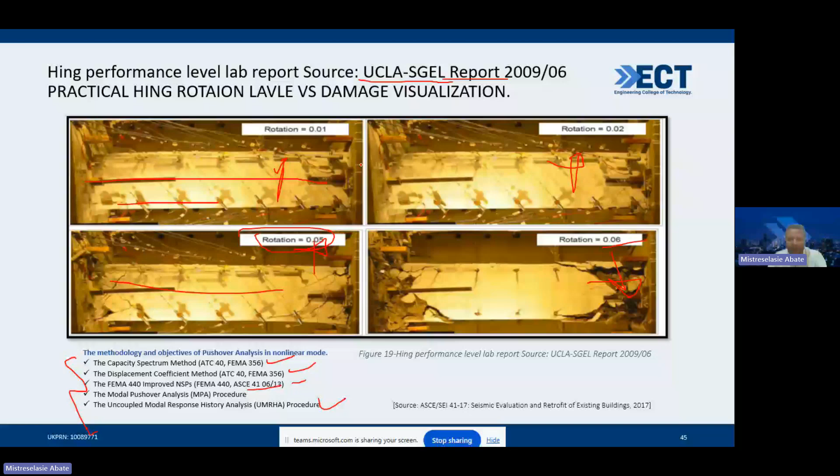So now at least you have the idea what is 0.01, 0.02, 0.05, okay? Because this is the way of doing performance-based analysis. So typical PBD we discuss now.

Now it will be clear because we start from linear modeling. We apply ELF and response spectrum, determine the capacity. Then we change the model to nonlinear model, and we check for service level and MCE level.

And then service level evaluation using linear analysis response spectrum, and the MCE level with nonlinear time history analysis. Then check the performance. If the performance is okay, if it passes collapse prevention, it's okay, finish your building. If it is not okay, then repeat.

So you have to go back to linear analysis and change the section, the beam, the column, and everything. Again run the linear analysis and follow this step. That is what it means.

So this PBD is very wide. It starts from the client, then the architect always starts the building. Then we have the structural engineer.

Then the structural engineer, we have PBD specialist, and we have site specific consultants and PBD peer reviewer. PBD is reviewed also like a paper, because it is a very long process. So it should be reviewed.

And these apply ATC guidelines, FEMA, NEHRP, PEER ground guidelines for tall buildings. And this PEER we have seen now, we also extract and download earthquakes.

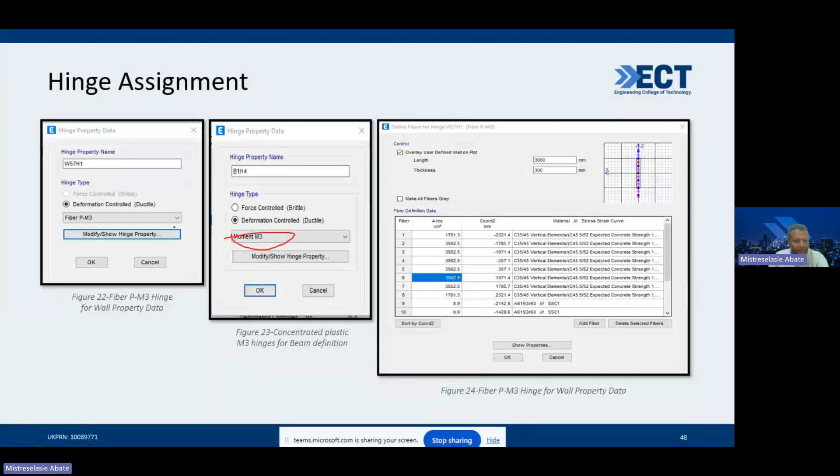So this hinge assignment we have seen now, how to assign for beam, okay.

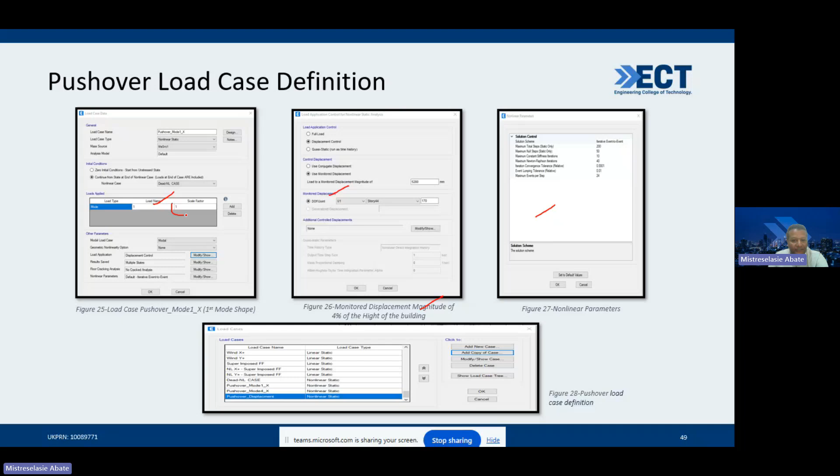All these are for ETABS, okay, pushover load, how to apply pushover load scales, all these things. This is load combination, load cases. We have seen it now. This we have seen it now.

So now let's compare. This is the main reason why PBD. So at the code-based level, the engineer says, I don't know, because I use the code. If the building fails, I am compliant.

That's why in the world now, all the buildings we hear every day, collapse, collapse, collapse. That doesn't mean the engineer doesn't comply with the code. That's why the engineer says, I am not sure, but I follow the code.

That's why when the building collapses, will it be damaged, or can I use the building after a given earthquake? All these questions you ask him, at the code level, the engineer is not sure.

But at the performance-based level, now as we have seen, we know the performance. At what push level is immediate occupancy, collapse prevention, life safety, we know it. So at this level, will the building collapse?

Will it be damaged? Can I use the building after a given earthquake? How much will be the cost? How long will it take to repair? Can I make the building so that it will not be damaged and will not collapse?

Now the structural engineer will say yes, and I can answer all these questions, because he knows at what level which column will fail, as we have seen now. When he pushes, at what level will the hinge be formed.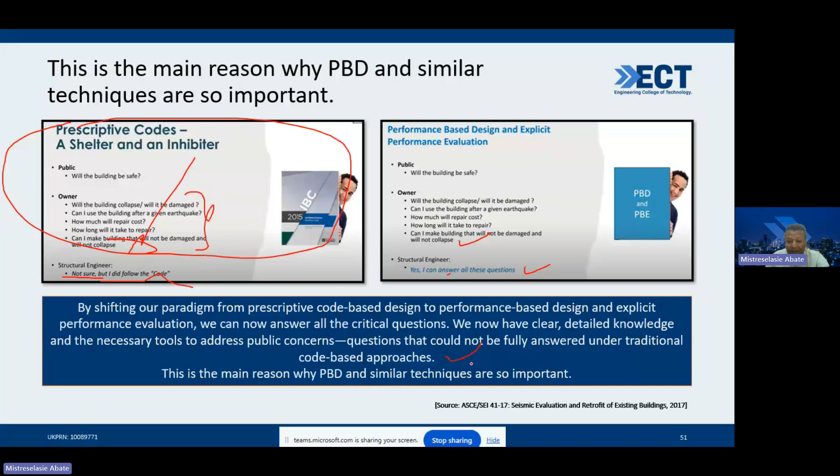So now the problem is how to convince the client. Now we know that PBD is good, but how can we convince the client? So we have to start with the client. If the client asks, what is the benefit of applying PBD? He will ask you this, because PBD will cost a lot of resources, yeah?

If the client has money and can pay, we can say we can design the building for capacity 5, 6, 7, 8, like for example in Japan, 9. Why do we limit the client? That is the most important thing. So he will ask you, even if it costs him money, safety will be guaranteed.

Then our response shall be: your building will achieve higher and certified performance compared to buildings that do not follow the PBD approach. In addition, you will receive a performance guarantee and certificate from the design consultant. So the design consultant should be responsible, okay? Because when you are doing performance-based design, you have to assure at what level of earthquake you know how the building behaves. That is the beauty of performance-based design.

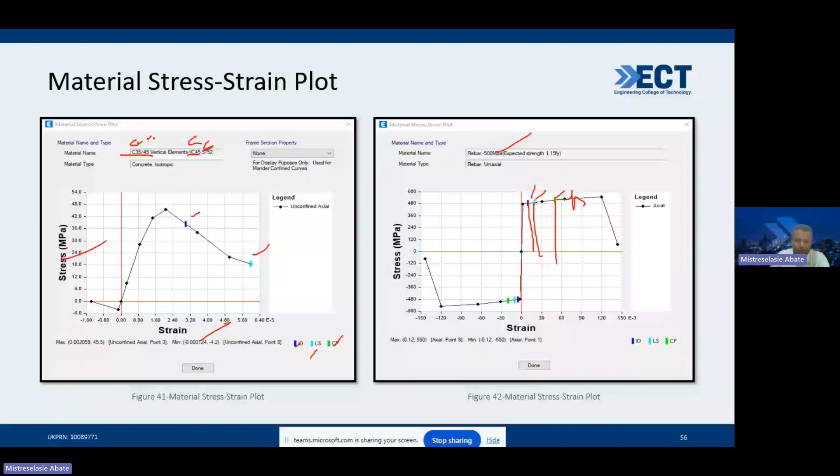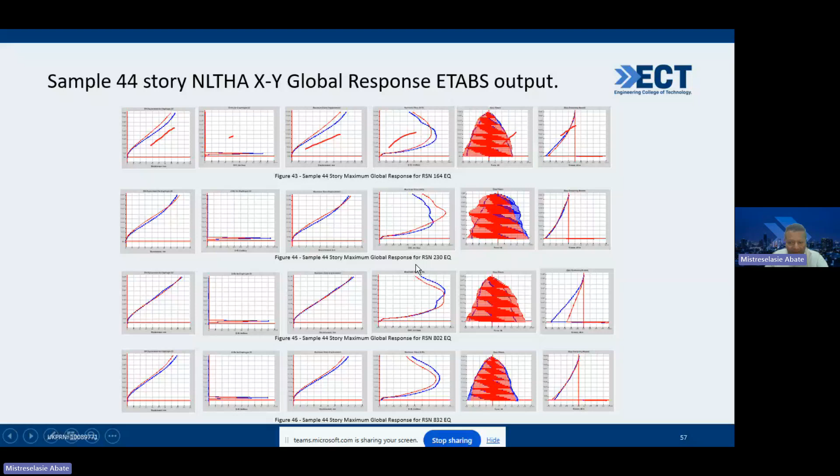So this is all global responses: shear force, moment, displacement, all these things. You can go here. Let me take you here, 3D. And what you can do is go to display, then cumulative response, this one, story response plot.

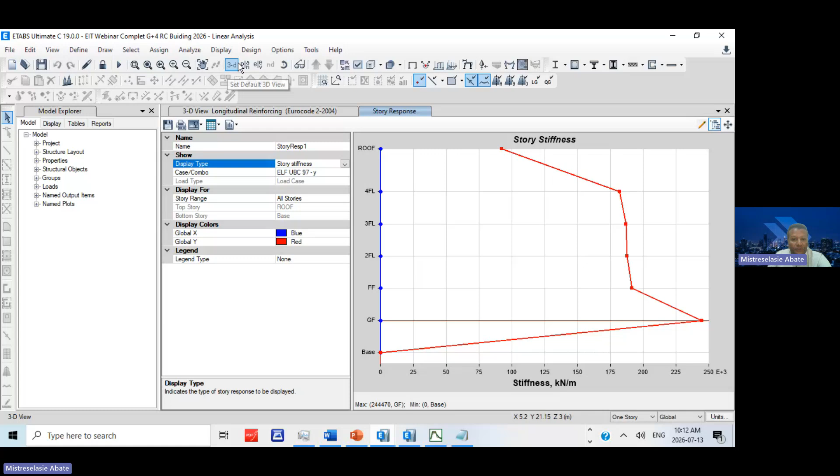And let's choose a case, let's see alpha for example. So as you can see, we have displacement, we have drift, we have displacement again, story drift, and we have shear force. These are all global responses. And we have moment, and we have stiffness, everything you will get. And if you want, you can also display the combined response, and it will give you all of it combined at once.

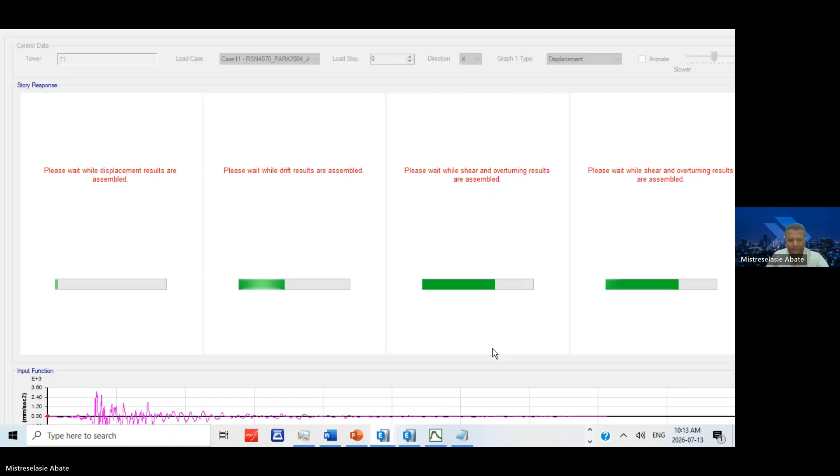So this is the earthquake, and I will show you in a moment once it's downloading. Once we have the displacement, the drift, overturning moment, and the shear, everything we will get, the software will give you. Just one minute. It's okay, it's downloading. Okay, so it's downloading, it's taking time, and once it's finished it will give you the results, and you can select.

Okay, it comes here. So you can select, even for the earthquake, the load case here, and the steps and other things. Okay, this one is downloading the displacement part. If you choose the earthquake, once it is running, it will give you the responses all together: the shear force, overturning moment, displacement, and everything. And you can choose to animate it and everything. Okay, so it's taking time.

Let's go back to our presentation. So what we are going to do, this is the global responses. Now you know from where it comes. This is shear force and everything. And this one also, the DC ratio, you can see from this one, for example, the DC ratio result for immediate occupancy, only for immediate occupancy. This is for life safety. This is for collapse prevention. Okay.

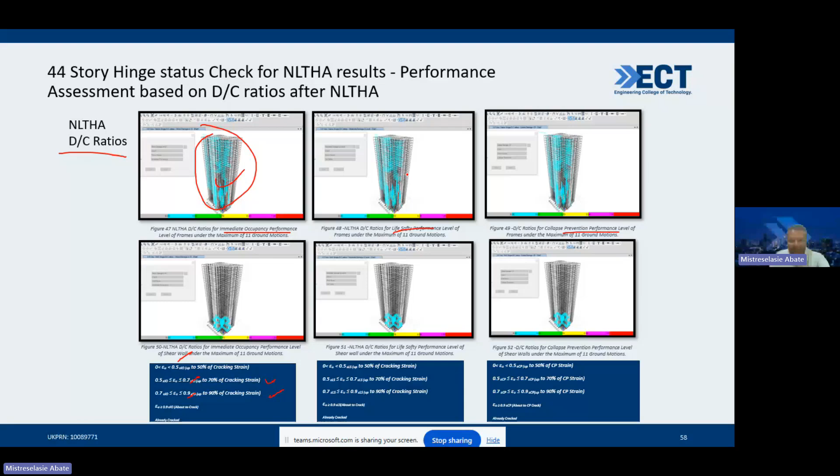You can see, for example, for stress level from 0 to 0.5, 50% is cracking strain. Again from 50% to 70, this is cracking strain, and from 70 to 90, this is cracking strain. Because you have immediate occupancy, and from the immediate occupancy level you give the stress level 50%, 70%, 90%. This is how immediate occupancy gives you, this is life safety, and this is for collapse prevention. This is all the same thing we did.

So overall, in our research we tried to see dynamic linear time history analysis, response spectrum, and pushover analysis, nonlinear time history analysis, in both X and Y, to see which response gives more. As per code requirement, static equivalent lateral force procedure always gives higher results. That's why when we make dynamic analysis like response spectrum analysis, we have to scale it up to 80% of the static analysis result. That's what we observed here too. Most results for response spectrum were higher because response spectrum is multiplied by the omega factor, which gives a higher result, as you can see here.

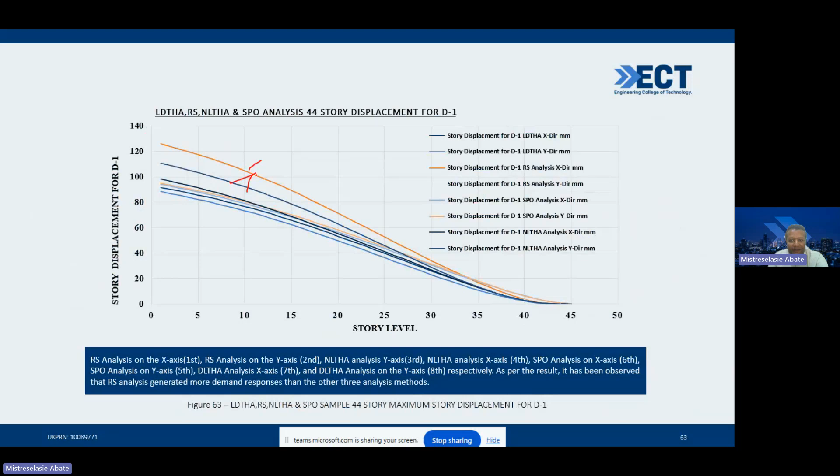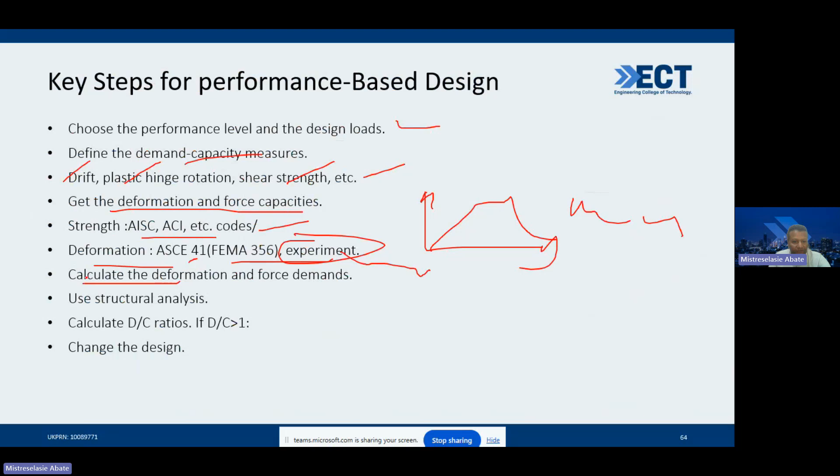So the key steps for performance-based design: choose the performance level and design loads, define demand capacity measurements like drift, plastic hinges, shear, etc. Get the deformation and force capacity as we've seen. We know from ASCE 41, then strength from AISC, and we took deformation and calculated it from experiments. No need for experiments now because from ASCE we can find it, use structural analysis, then calculate DC ratios and change the design. Most of these papers are published, so you can go ahead and check them—it's very helpful, published in MDPI.

And so this was the presentation. I think from my side we have seen everything I wanted to show you now, especially regarding the load combinations.

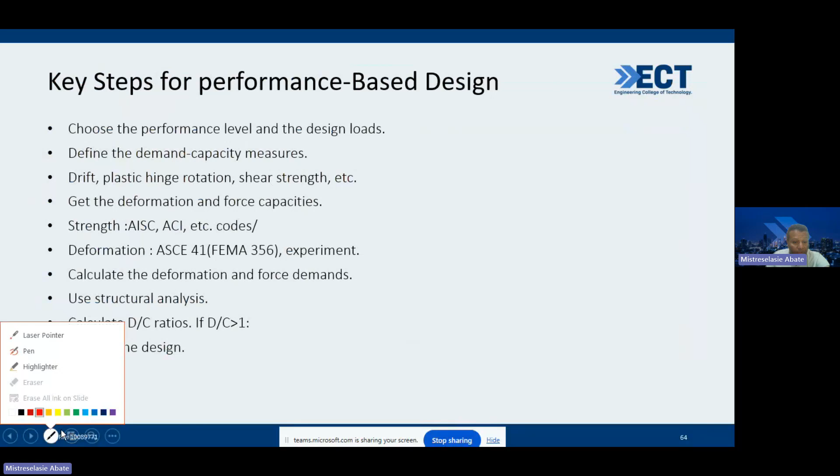In the load combination part, not only two loads are there—as you know we have seismic loads and quasi-permanent loads, like dead load 1.35 plus live load. This will be reduced by the psi2 factor, then plus seismic in X and plus seismic in Y. So if you take 100% seismic in one direction, the other will be 30%. That is how we do it. In the Eurocode, this is equation 6.10. That's what it gives, when the load is leading and accompanying, favorable and unfavorable. The psi2 factor is given for the leading load, then the accompanying one, and also differs for favorable versus unfavorable. This is the rule found in the Eurocode.

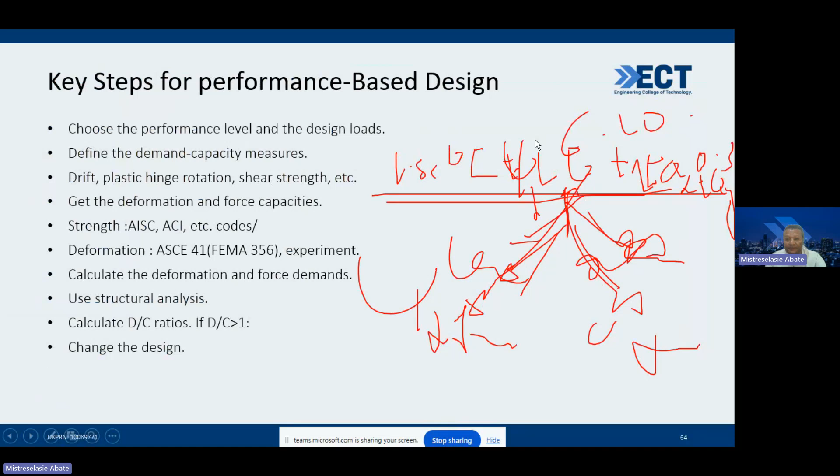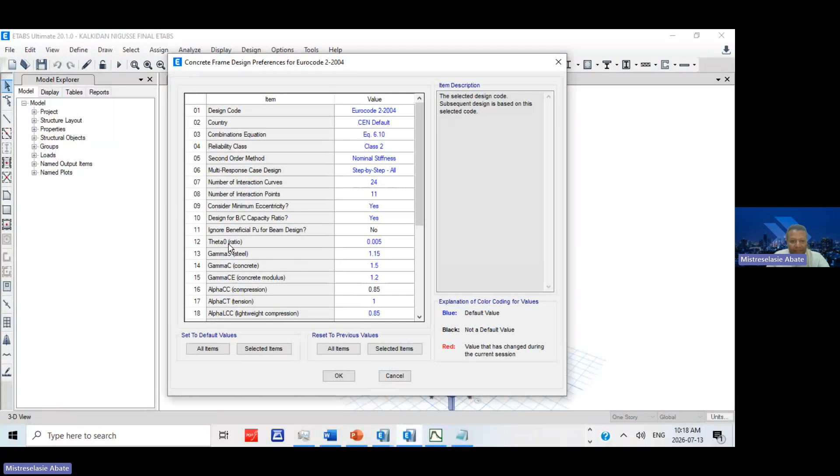That's why, using this combination in what we've seen in the load combination—for example, this one is for imperfection load, because we add imperfection load here. One thing you have to take care of: in the imperfection load, if you go to preferences and find theta, this theta value is 0.005. If you give 0.005 here and also add imperfection load elsewhere, it will double it. You have to take care. So if you add the imperfection load in the load combination here, you have to set that value to zero.

For example, what I want to show you in the wind load case—all this imperfection, this is gravity, seismic, for example. Let's check this one, this is also imperfection. So the imperfection load makes it almost huge, because all the imperfection load should be combined with seismic gravity, and the earthquake and the imperfection will be attached. So most of the time when we say earthquake load combination, you have to take care of this.

What else—that is the most important thing about performance-based design. So this is the procedure, and from my side, I think I am done. Thank you so much, I really appreciate it. I hope you got something from this webinar.